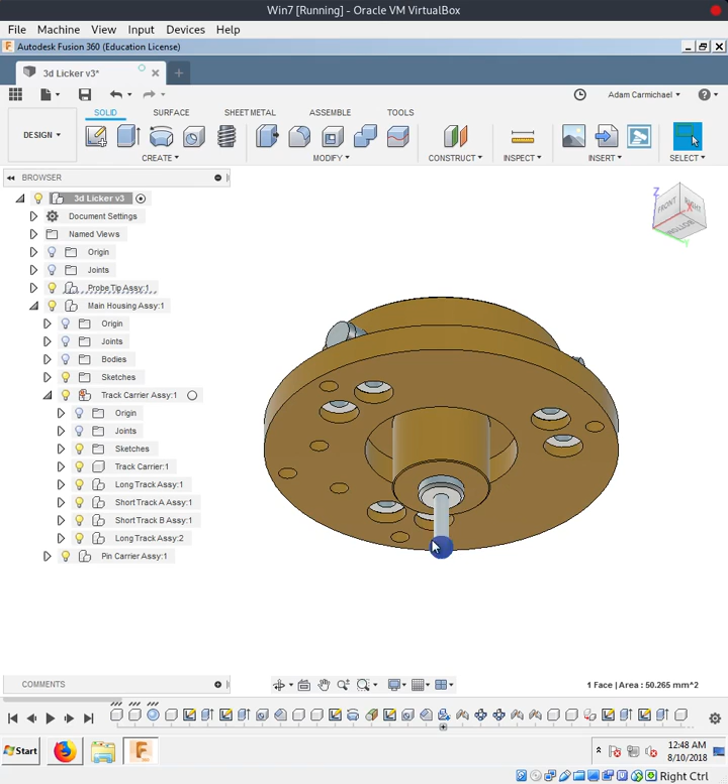This is the probe. This little red guy here is the very pointy part that will do the probing. Up the top we've got the contacts. So current will go in through a little wire terminal screwed in here through an M3 or M2.5 screw and

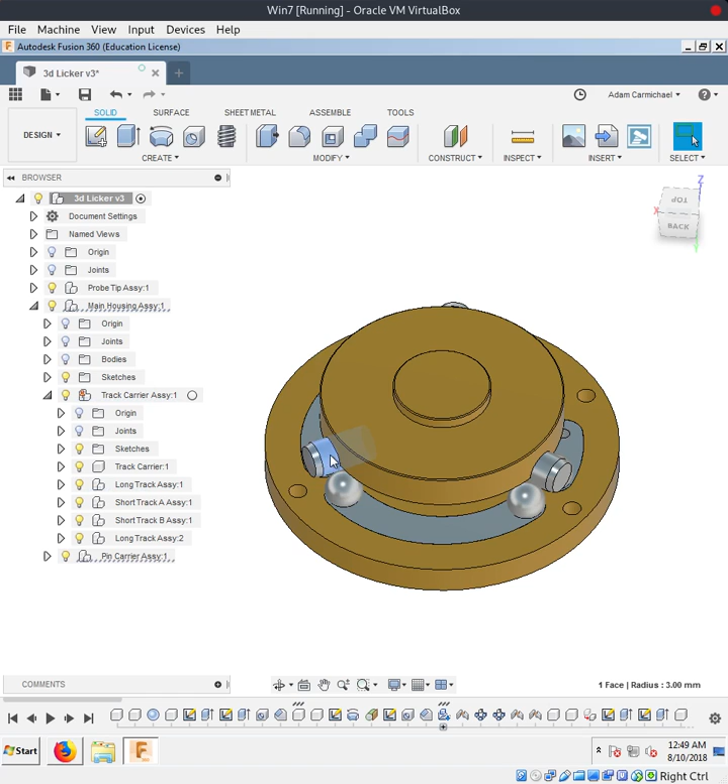terminal, and the current flows through this ball, through this 6mm pin here, and then around the track, through this ball, around this track, through this ball, through that pin, and so on and so forth until it comes out this terminal here and goes back into the control box.

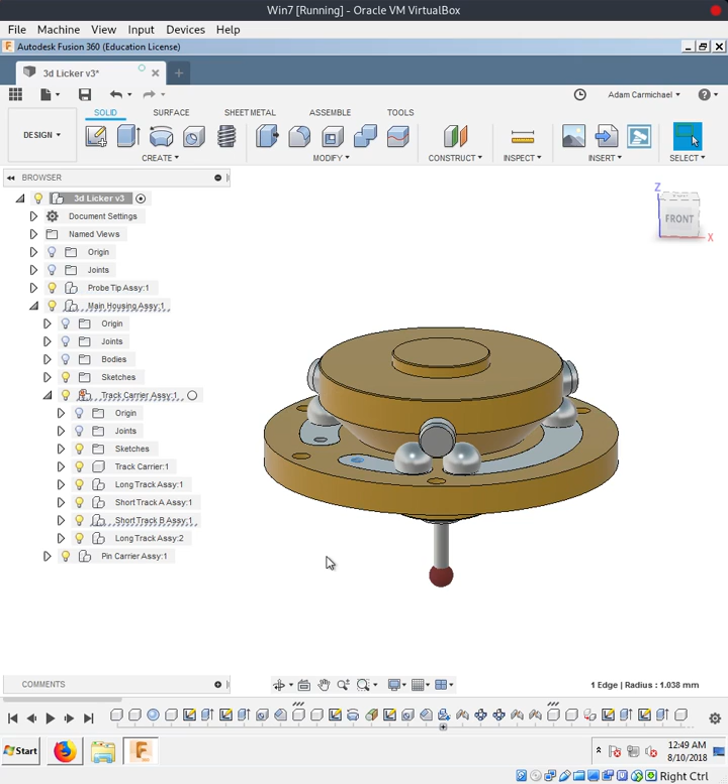So 5 volts in, 5 volts out, but if the probe tip is contacting something, one of these 3 pins gets lifted up and this 5 volts out here gets broken and pulled down to ground. So that's sort of how it works, and it'll get housed inside of a block that I haven't finished modeling

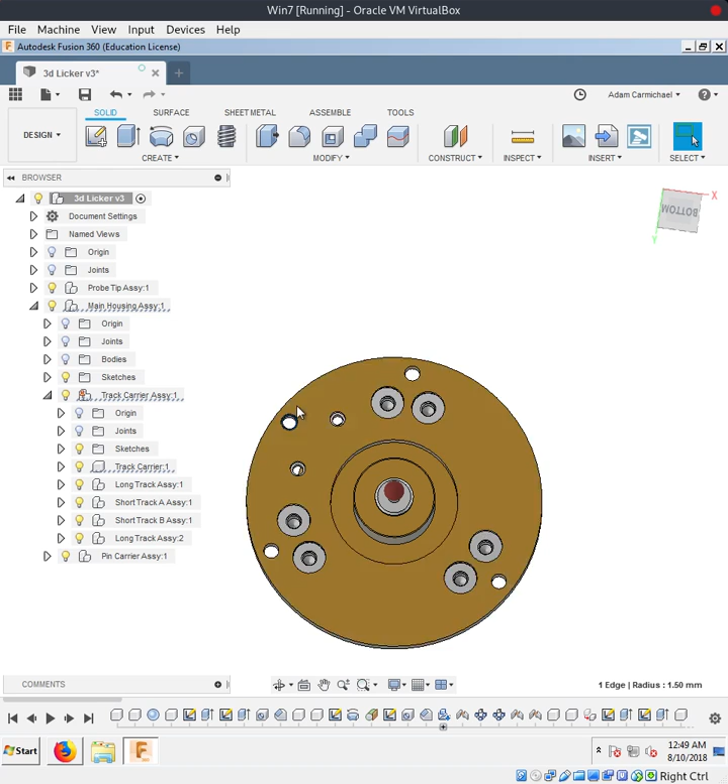yet. To keep things sort of in alignment, I've got 4 tooling pins, 4 tooling holes, one here, one down here, one here, and then this last one might double up as a way of keeping the wiring at bay, and also it aligns the whole assembly, well, it aligns this whole yellow plate that's now highlighted in blue.

When I'm actually building it, things will be aligned to go into pins and stuff to keep it all well aligned and not too far horrible.